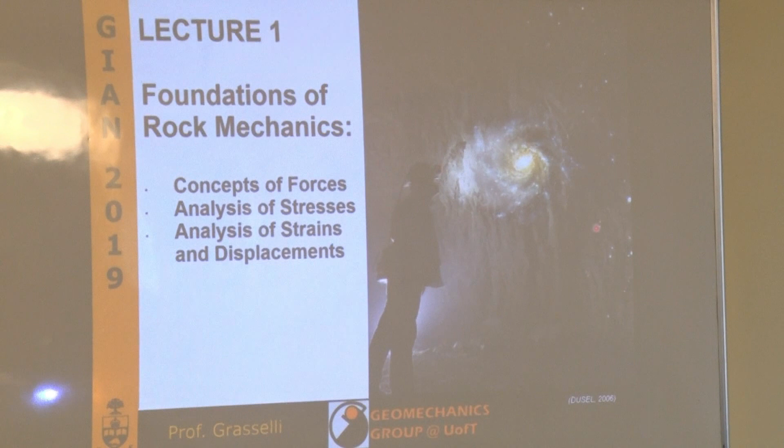And again, all what is there will be given to you - the equations and all the others will be available. So just a couple of things, just a definition. Let's remind what stress is and what strain is. Stress is basically a force that is applied over an area.

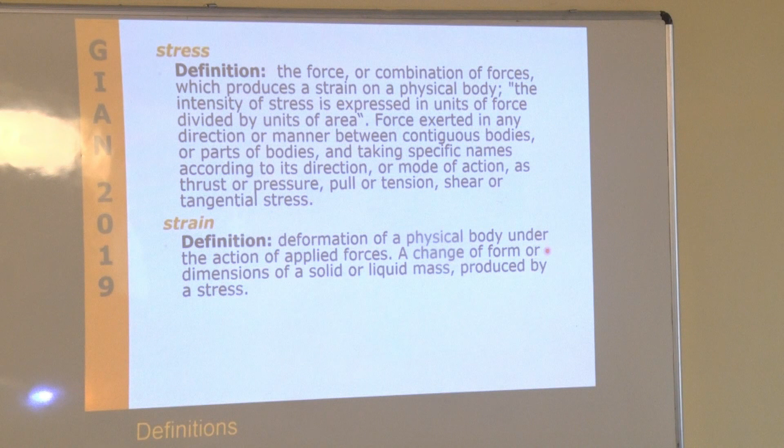And stresses can be compressive stress, can be tensile stresses, can be shear stresses. It depends really on how they are applied with respect to that particular plane where the force is going to be distributed.

The strain is really the result of the action of the forces in the body - so it's really the deformation. That means how shortened or what is the elongation of that body with respect to its initial dimension. That's pretty much what you need to remember.

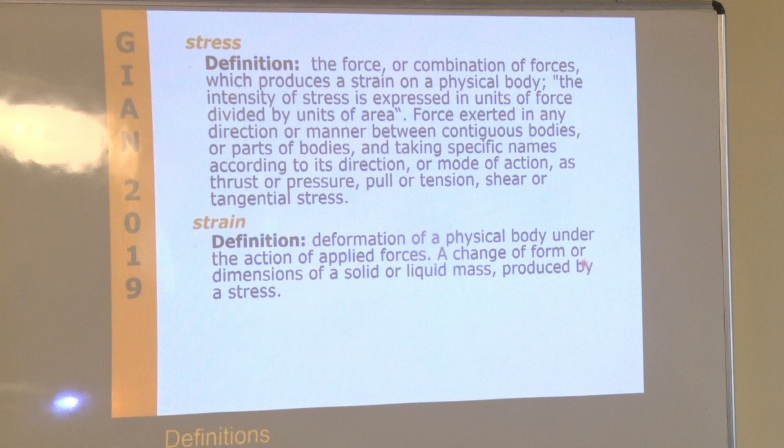So what we are looking at is, well, the force really is a vector. You can always resolve your vector, for example, into a normal and a tangential component with respect to a point, a plane. And the stress is really the distribution of that particular force with respect to an area - so it's really defined with respect to a plane. And that's really what we are going to use.

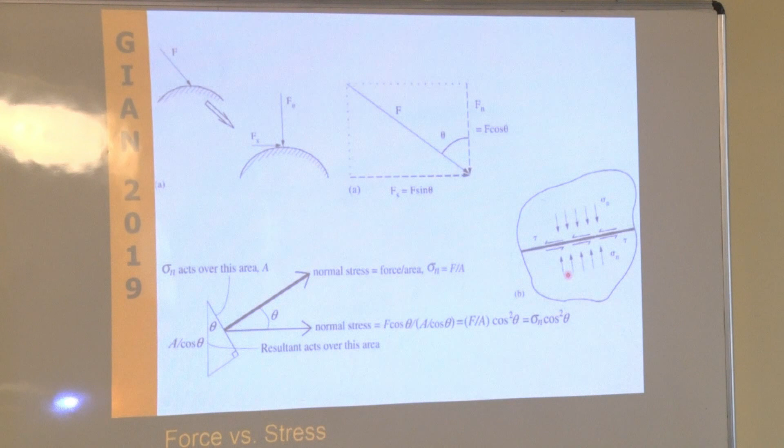The stress is, at the end, a property at a given point. And within a rock mass, what we are looking at and trying to always understand is what is the stress at one given location.

Because that stress will result in a displacement, a deformation, and that deformation is really what is going to cause potentially the failure of your rock. And that is really the challenge.

And what I really would like is there's math behind this, but math is a very nice tool, though it shouldn't be the goal of this course. It should be a tool to actually understand and resolve mathematically what is the condition of the rock.

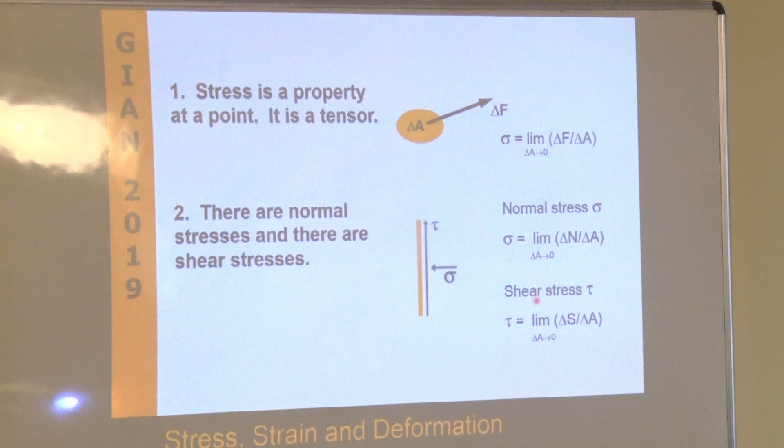So the thing we need to remember, which is very important, is that stresses with respect to a plane can be perpendicular, which is normal stress, or tangential to that plane, which are shear stresses. Those are the two things we really need to care about, because those are the stresses we need to resolve and understand to figure out if our rock is going to be stable or not. That's pretty much what we have.

So from a mathematical point of view, we can have our cubic element, and resolve stresses in the three axes: sigma x, y, and z. On each single facet of that cube, we can resolve, along two axes that we arbitrarily choose, what are the shear stresses along those facets. Mathematically, we can write them in matrix form.

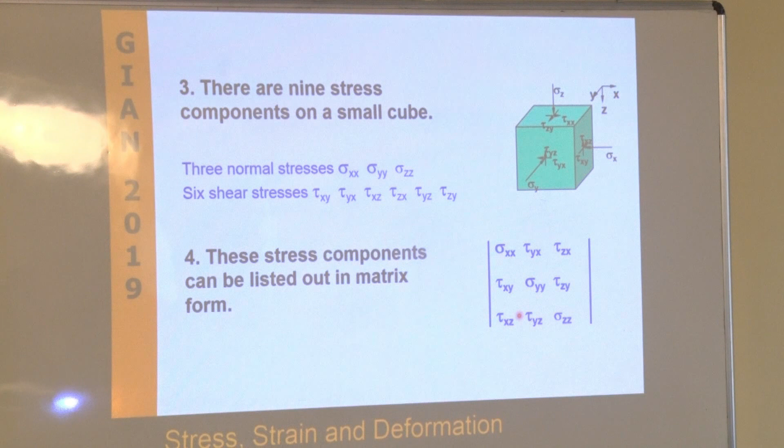Then, because of equilibrium, we can actually derive that matrix is symmetrical. So, for example, tau xy is equal to tau yx.

Okay, that's something that I'm sure you have already done, right? Yes. I'm not asking if you remember, I'm asking if you have done it. Yes. Okay, that's a very big difference.

I know that you have the notes, and if you need, you will go and try to find them, or maybe Google for the solutions. That's fine.

The other important thing is that we can always find the directions along which the shear stresses basically disappear and go to zero. So our matrix becomes diagonal mathematically. That's important because we can define our stress state with only three variables called principal stresses: sigma 1, sigma 2, and sigma 3, where 1 is the highest, 2 is the intermediate, and 3 is the lowest. Those are the three stresses we are always looking at.

But we need also to know how to go from one state, one orientation of our small cube where we have only sigma 1, sigma 2, sigma 3, to another one where we have also the shear components. Why do we need that? Any idea? Why do we need that?

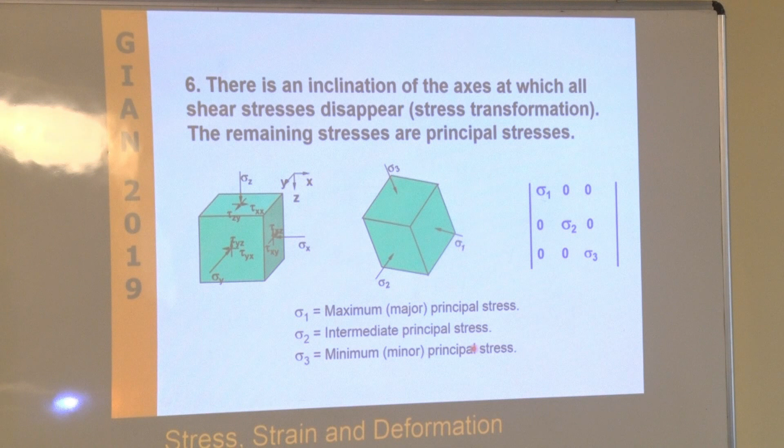Oh, by the way, I'm asking questions, and I was told that normally these types of classes you are extremely talkative. So just don't tell me that it's not correct.

Why do I care? Why do I care to know, to be able to go from one orientation to the other? What do I care? Okay, I will ask you later. You don't want to answer? Okay, you will get the question again.

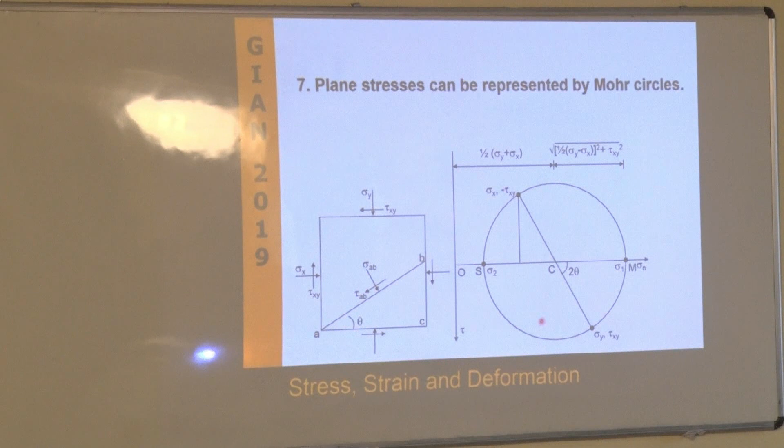So the other thing is, oh sure, that's the answer. So why? Because we can always resolve what is the normal and tangential force on any given plane, specifically on a plane where, for example, a fracture exists. So we know what is the shear force and the normal force on that particular plane.

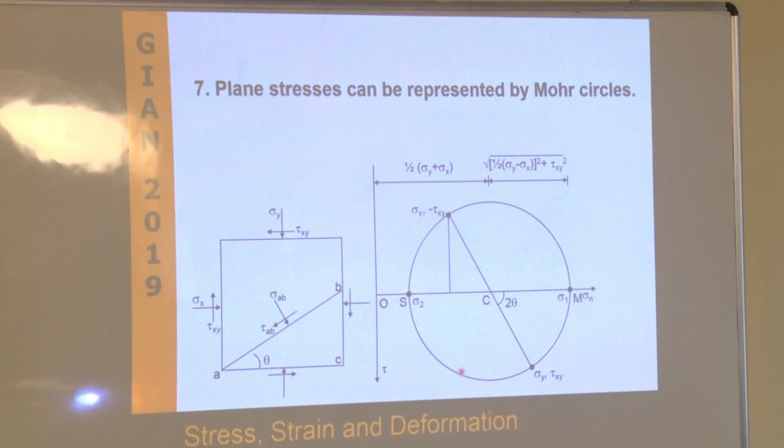And one very simple way to actually picture that in two dimensions is nothing else than using the Mohr's circle. And you will remember, it's good.

The other thing that is important is to realize that when we apply stress to any body, that body will react in some way and will start to deform. That means there will be a deformation that is related and associated to the stress that is applied, right?

So if the material is perfectly elastic, the ratio is so-called E, the Young's modulus. And that is what our books are saying. We can find the Young's modulus of rock, and we're happy because we can design anything with that. And I will see what is the flaw then.

But it's correct that normally when you have a linear relationship between the strain that you measure and the stress you apply, that is really the elastic behavior of the material, and that relationship can be described by this quantity E, which is nothing else than the slope of the plot between strain and stress applied, okay?

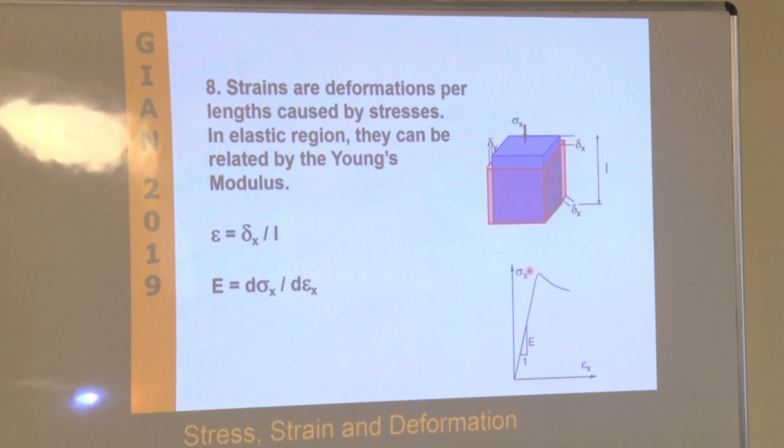The other thing we need to be aware of is that when I deform a material, say I apply my force along one single axis, what is happening is that yes, I make that object shorter. But at the same time, the material also deforms in the other two directions.

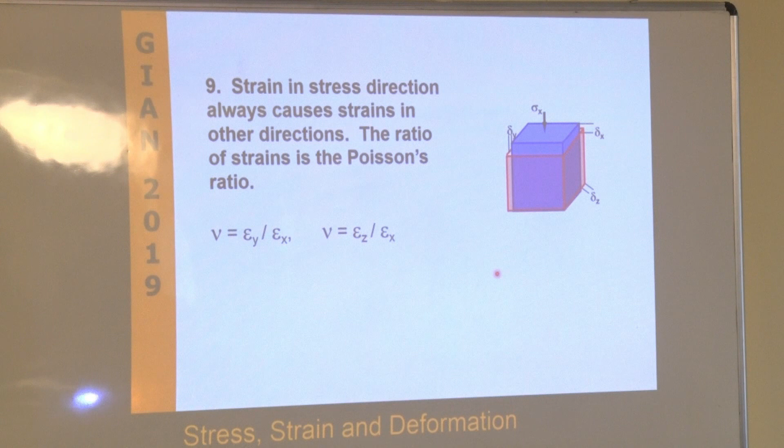So what we can define is another quantity called the Poisson ratio. That is the ratio between the lateral strain and the axial strain. If we have a cube, we can define two different lateral strains, one along Z and one along Y, so we have two Poisson ratios. If it is linear elastic, those two Poisson ratios will be exactly the same. Poisson ratio is a constant for a material when it is linear elastic.

The other thing we can do is put all that information together, so the strains and stresses can be related by quantities such as the Poisson ratio. Those relationships give us what is the constitutive law of the material, which tells us how the material deforms under a particular given stress. The matrix in the middle is made of those elastic constants, basically the Poisson ratio and the Young's modulus.

Now, I'll spoil immediately what I'm going to say: this is valid for linear elastic or elastic material. Is the rock elastic? That's the question. And the answer is no. That's the problem. It is elastic in a very specific range that personally we don't care about, because what we are looking at is always to avoid failure, but to get as close as possible to failure as we can. And when we get there, the material is not elastic anymore. That's a challenge we face, especially in mining.

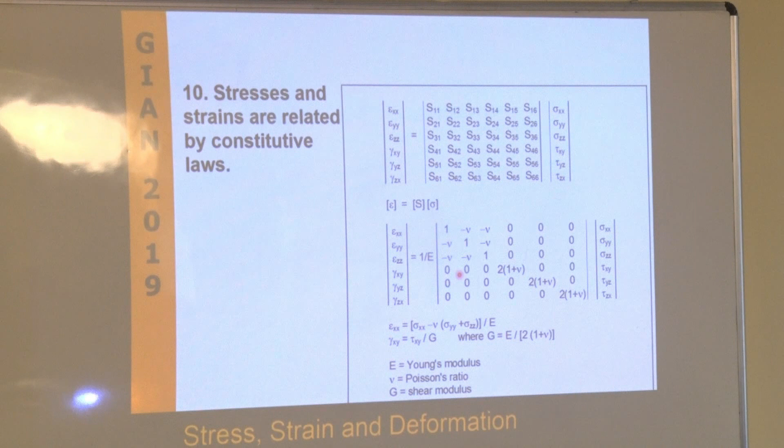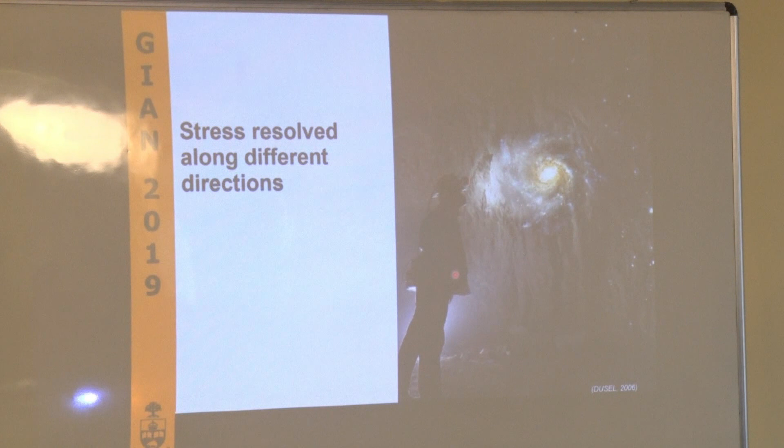Now, the thing we always need to be able to do is resolve the stress in any direction. Specifically, what we want is, given a particular stress state, we generally like to use the principal stresses where the shear disappears.

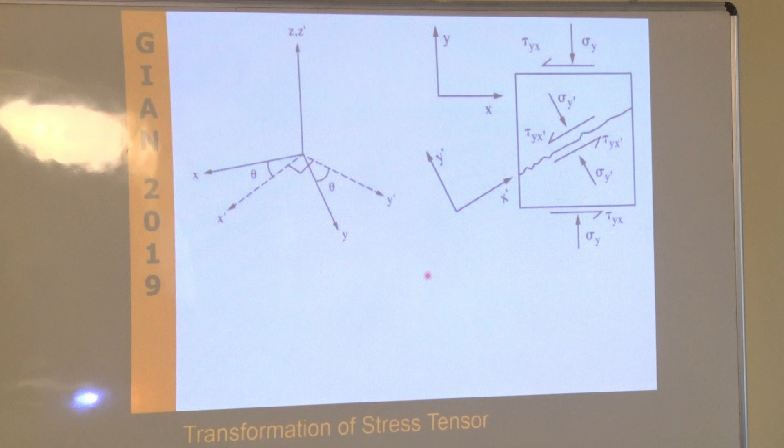But then we have fractures, features, geological contacts, or whatever, where we need to know what is the shear stress applied there, and also the normal stress, because the two will tell us if the particular stress condition and geometrical condition is going to be stable or not. That's really the challenge. So we need to be able to resolve what are the normal stresses and the shear stresses on one given plane, and that is where the math comes back.

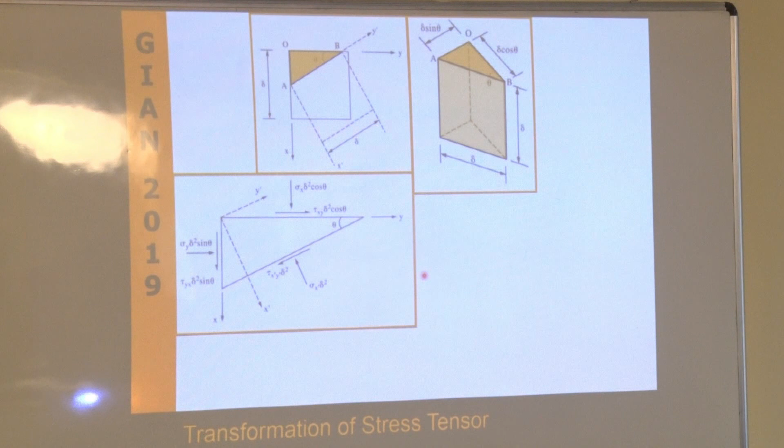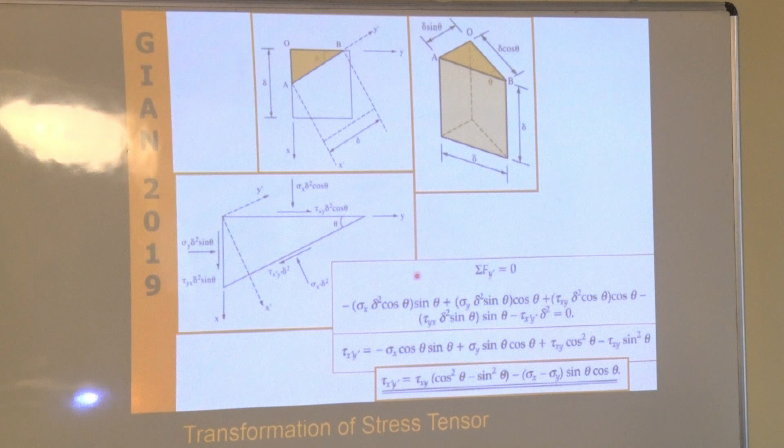So at the end, what you want is to transform your stress tensor and resolve what the condition of the stress is in that particular direction. You start using equations like this. You remember those, right? So my point is that yes, you have this math and you actually need to use it, because what we want is to be able to go from one condition to the other and back.

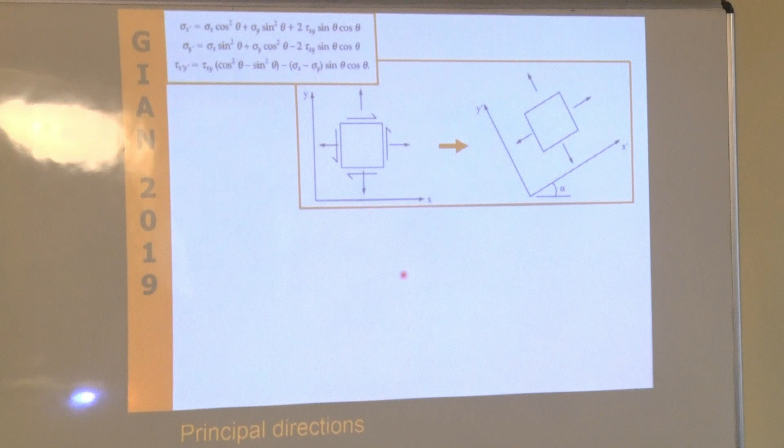If you do this calculation all the time, you will remember it by heart, and those equations will be your friend. The reality is that if you don't do this calculation all the time, you'll have a book and these notes, and you can just refer to them and use them.

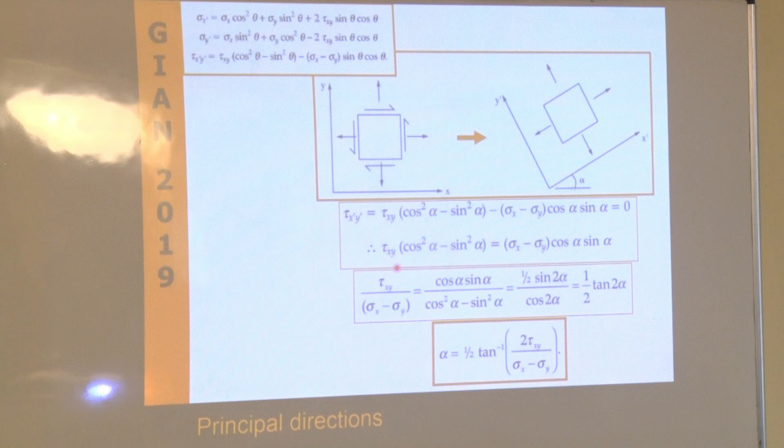And then what you can also do is calculate exactly the orientation, the angle with respect to which you need to orient, to turn your particular stresses. This is very important, because it tells you the orientation of the principal stresses, and those will tell you how the rock is going to behave. That condition is really what you need to understand—more than the math behind it, which I'm sure you can solve—I'd like you to understand where and how those stresses will be oriented, where the principal stresses act with respect to a particular condition.

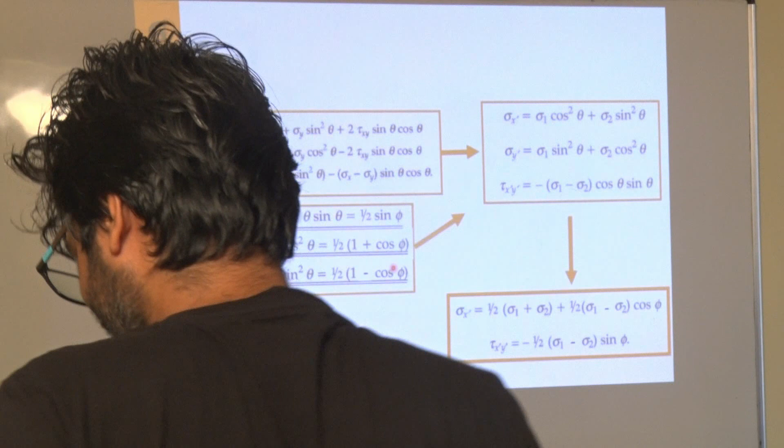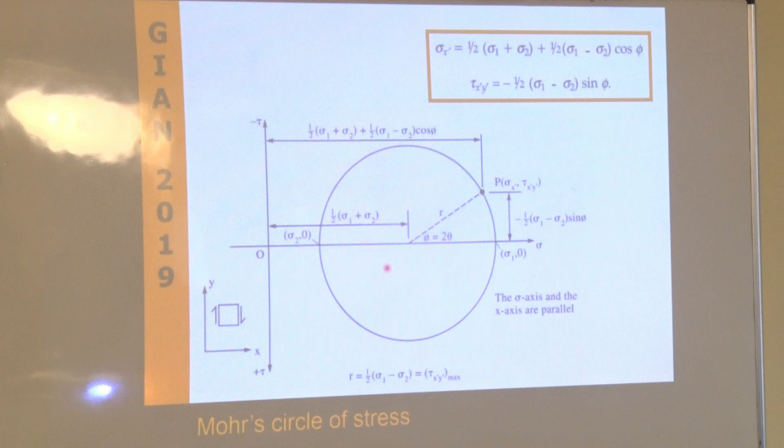A little bit more equations, a little bit more equations. I know, I'm skipping that because I'm not going through that math, which you can solve by yourself, either analytically or just using Mohr circles.

And this is really what we should start looking at. So we should start thinking about how the stresses are going to be distributed with respect to the rock, and start understanding how the rock will respond under those stresses. Okay?

So the exact value of the stress, yes, you can calculate. But as an engineer, especially in the mine or in the tunnel, a rock mechanics engineer, you need to be able to have a guess and understand how the rock might respond and what stresses you need to deal with, even before calculating. That comes from experience and from actually understanding the physics behind it.

And that is really, I think, what separates someone good at solving equations from a good engineer. You need to really understand how the rock will behave. Then you do the calculation just to verify and to get a number, a value, or a range of values. Because you have so many uncertainties in rocks that you cannot really have just one single value. You need a range. That range will help you actually engineer your problem and solve it.

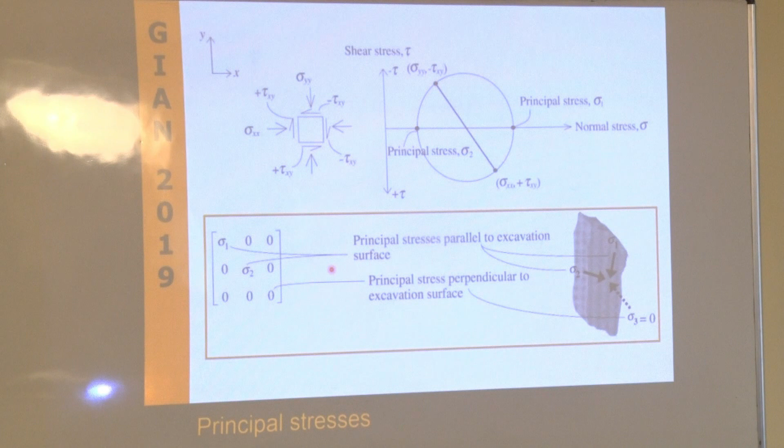What is sigma 1? Any idea? Come on, what does it mean? What are the principal stresses? Can you give me the orientation? At least the orientation, I don't care about the magnitude right now.

But you can tell me what are the relative magnitudes, and you should be able to give me the directions. What's vertical? I'm looking at the direction of sigma 1, sigma 2, and sigma 3. And actually, you can give me even the magnitude, at least of one of those. Speak loud, because I'm trying to speak loud, you need to speak loud. If I don't hear you, I cannot.

Weight of that beam. Weight of this beam. Okay, it's vertical. That is a weight. Okay, I'm asking for sigma 1, sigma 2, sigma 3. Becomes sigma 1. So what is the definition of sigma 1, sigma 2, sigma 3? Is the shear equal to 0, right?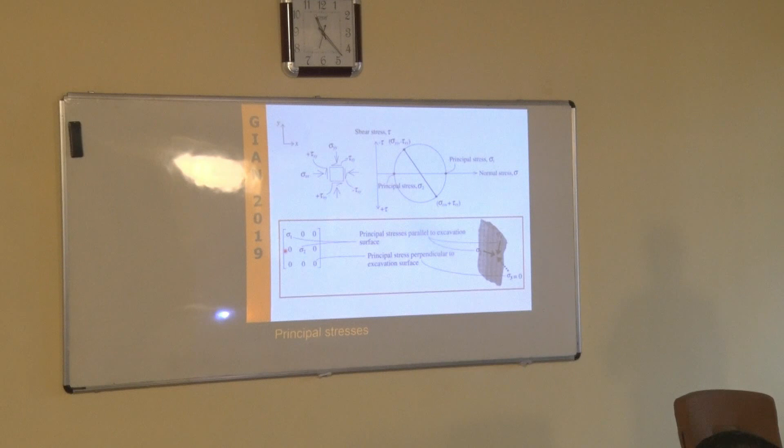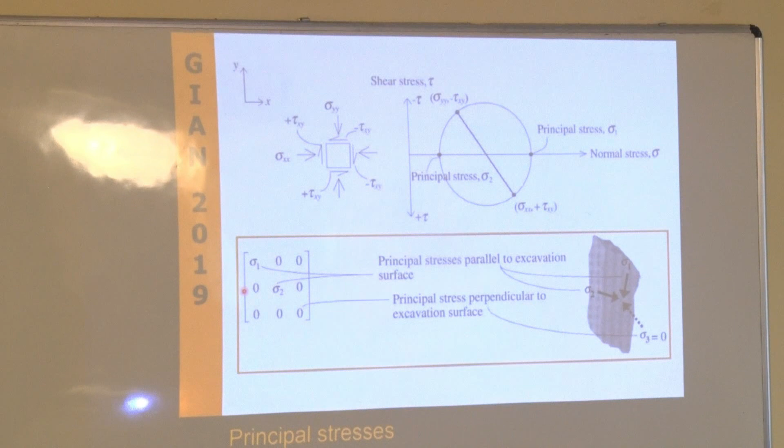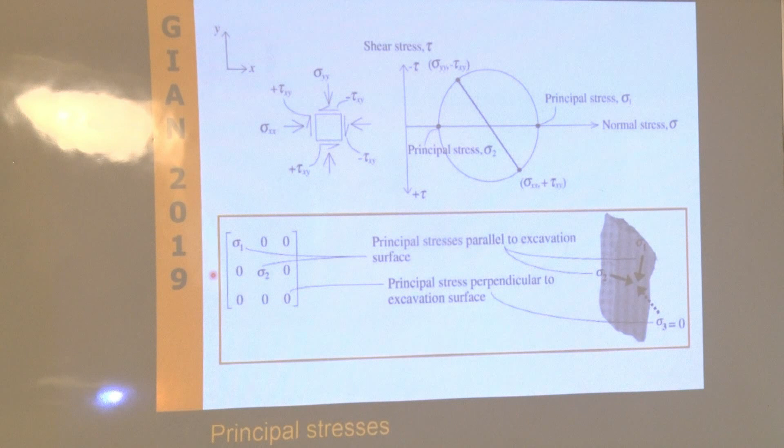So that is pretty much what you need to start thinking about: where the principal stresses are oriented with respect to your geometry, by simply looking at the definition, zero shear stress on that particular plane. When you start doing that, you bring a lot of common sense into the calculations, and you can actually connect the math behind it with reality. That's what you need to be able to do.

What does it mean? Let's go back to the fact that unfortunately our rocks are not nice material. A geological material has been created a very long time ago and went through a lot of stresses that have really broken that rock. It means that there are fractures, and a fracture is something that is pretty much open. You can think about it as a free surface.

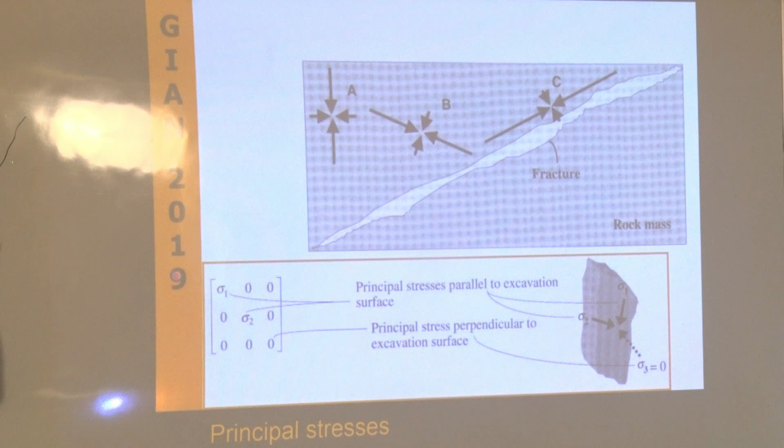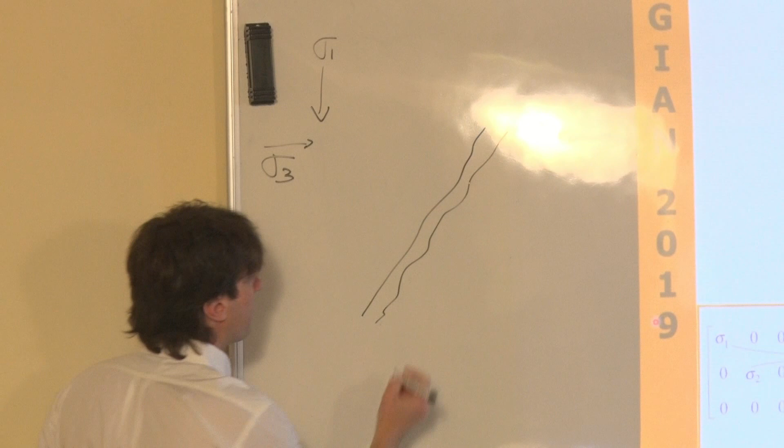So when you have a fracture that is open, what can you tell me about the stress acting on that surface? If it is fully open, then it's detached, so how are the principal stresses oriented? There is an air gap there. What are the stresses acting at that point? It's not touching. Sigma 1? Yes. How much is sigma 3? It would be 0.

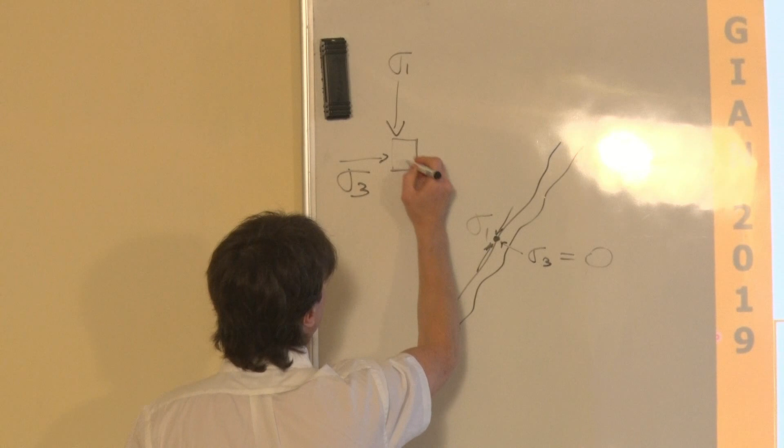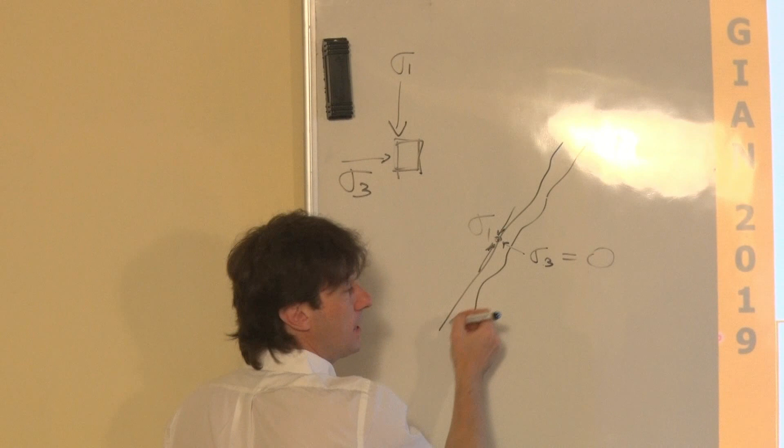So if sigma 3 is zero, I know that my sigma 1 is always perpendicular to sigma 3. So sigma 1 would be perpendicular, or parallel to that particular fracture. So what does it mean? That I have my cube, or my in-situ stress, with sigma 1 vertical and sigma 3 horizontal. Here sigma 3 disappears, and sigma 1 becomes oriented with respect to the direction of the fracture.

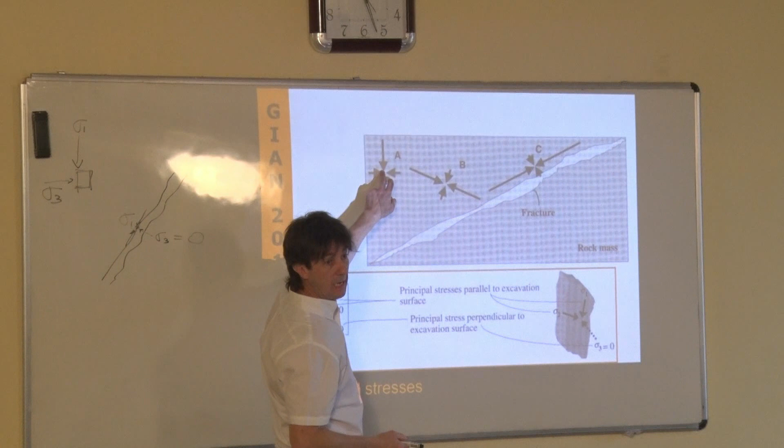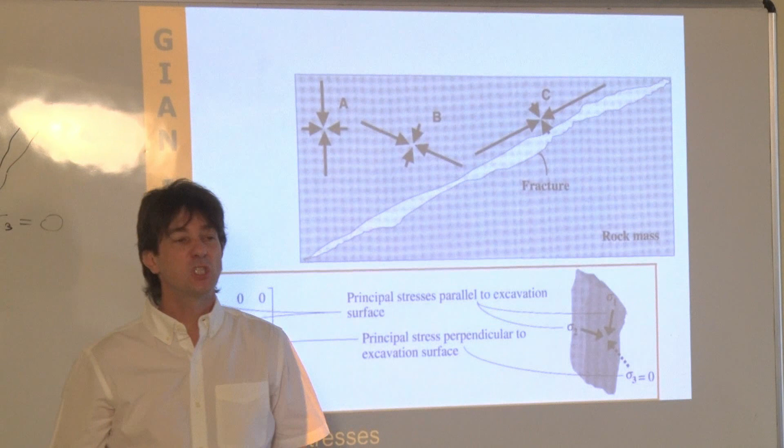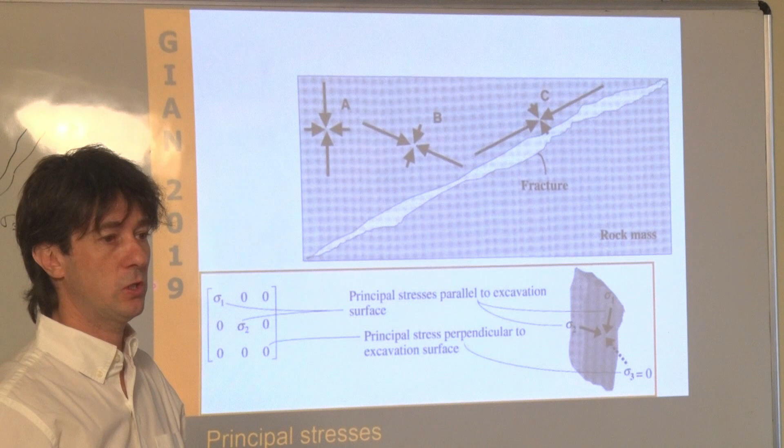So what it means is that you have a stress state at point A, far away, your far field stress. The closer you get to the fracture, that stress is disturbed. It means it's bothered by that fracture, and my principal stress will start rotating, up to basically becoming sigma 1 parallel to the fracture at the surface of the fracture. Do you understand that? You don't understand.

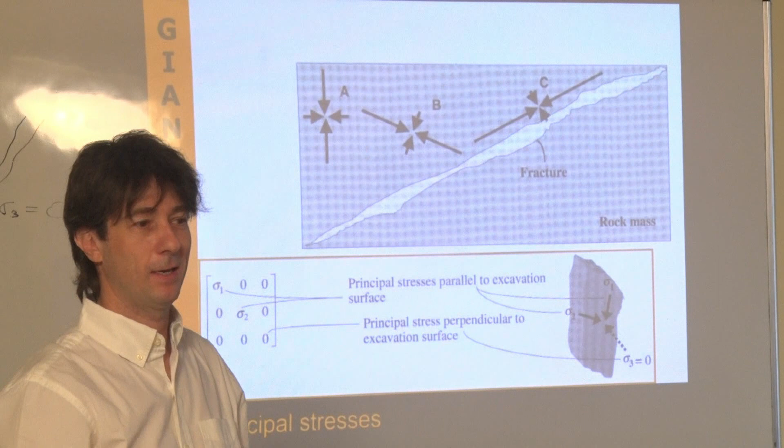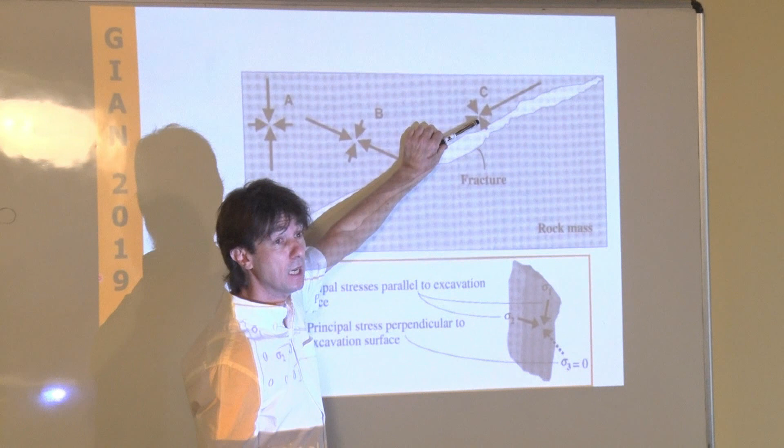What do you understand? What don't you understand? Why? So what you have is that your stresses, which are applied to your rock mass far away, feel the presence of your fracture. And that presence of the fracture, because it is open, means that at the surface of that fracture I will have a zero sigma. So the only stress that the rock at the surface will feel is really parallel to your fracture.

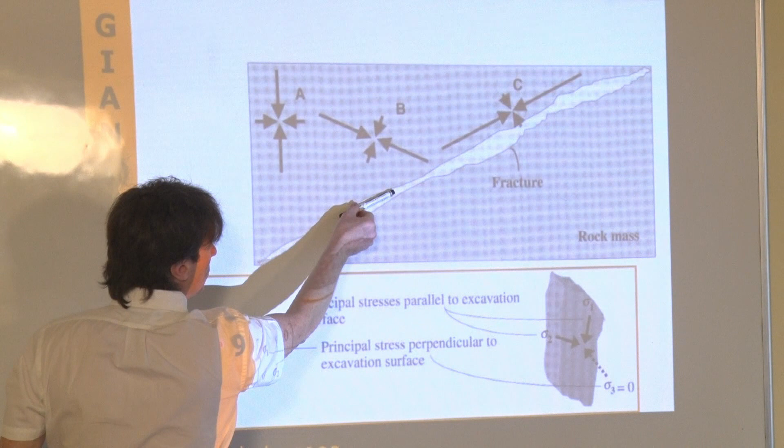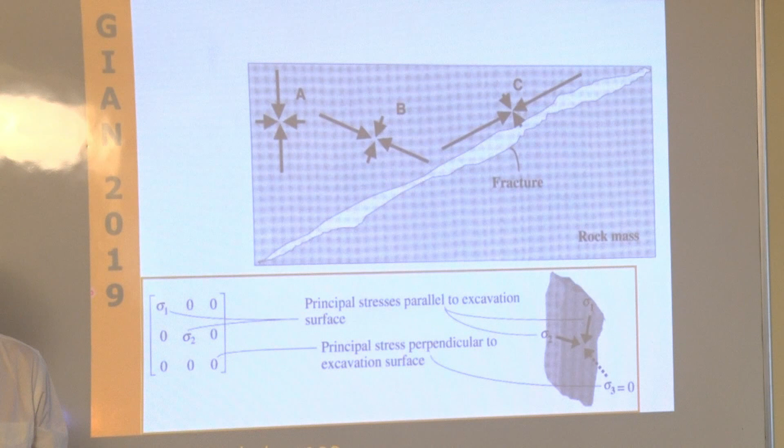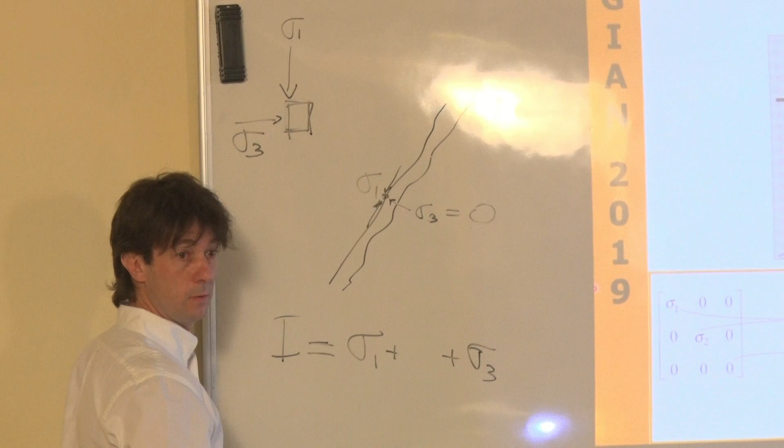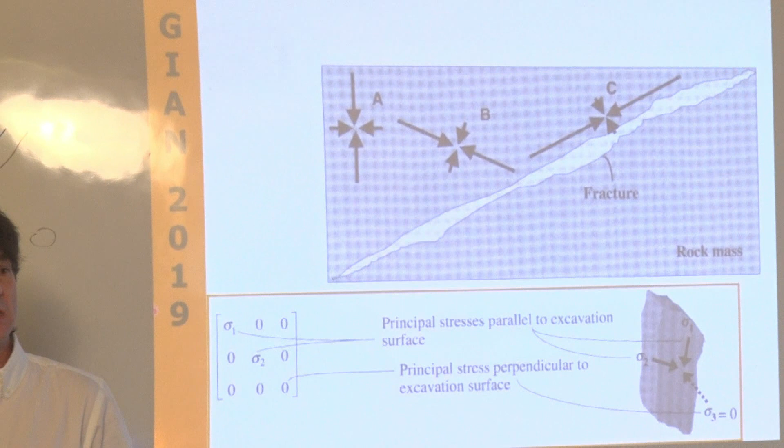But here it was oriented that way, there it would be oriented this way. This means that your stress goes from, let's say, sigma 1 vertical to sigma 1 parallel to the fracture, and it will start rotating up to that point. Plus, the magnitude is going to change, because you need to remember that the first invariant of stress says that sigma 1 plus sigma 2 plus sigma 3 is a constant. In this case, disregarding sigma 2, sigma 1 plus sigma 3 must be constant. That means that from a state of stress at A, at C you will experience basically a zero sigma 3, so sigma 1 becomes much higher.

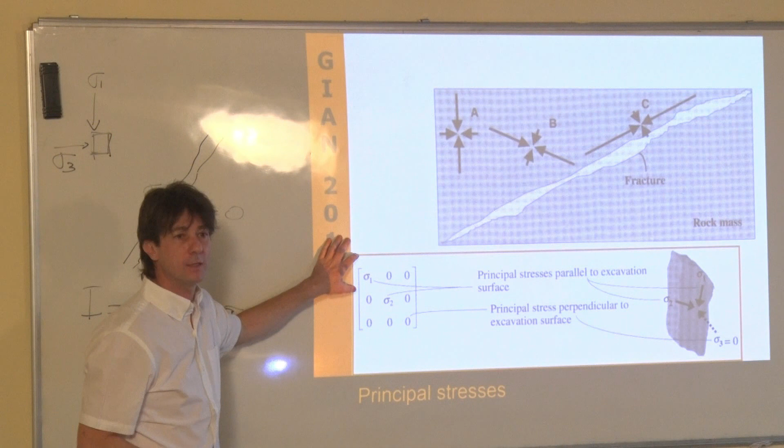What does it mean? It means that the rock will be subjected to a much higher stress, getting closer and closer to the point where the rock can fail. Is it okay? Sometimes when you don't understand and you do that, to me it means yes, this is yes, this is no, so I'm getting a little confused. But that's the point, and that leads to another point.

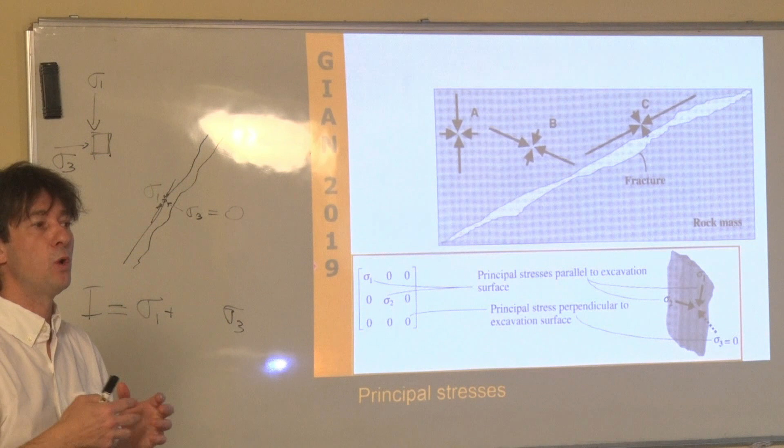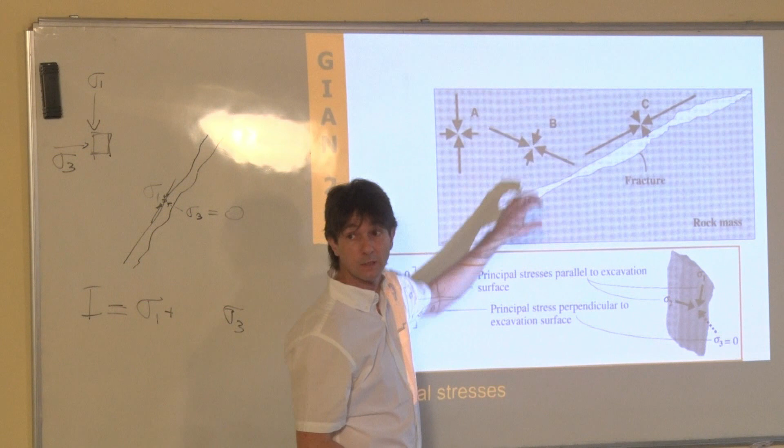The fact is that if you're creating an opening in the rock, could be a fracture, could be an excavation, could be whatever empty space, that empty space will perturb your stress. It means your stress will change locally, the direction of your principal stresses will change, and the magnitude of the stresses will change. So is it necessary that the principal stress will be parallel to that fracture? The maximum principal stress will be parallel to a free surface. If the fracture is a free surface, yes, it will be parallel, if the fracture is fully open. If it is not fully open, things become a little bit more complicated.

Are you okay so far? Confused? No? That's good, you're not. I'm doing a good job, or you came already prepared.

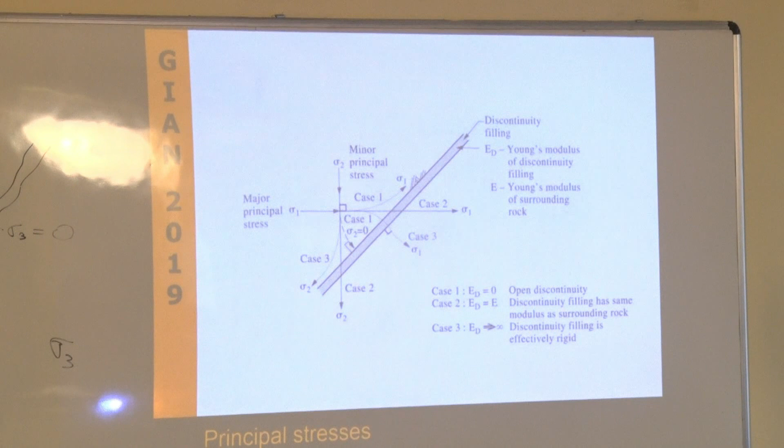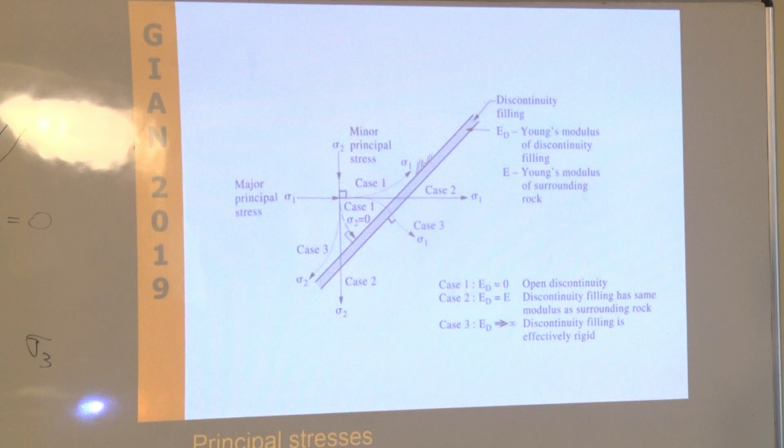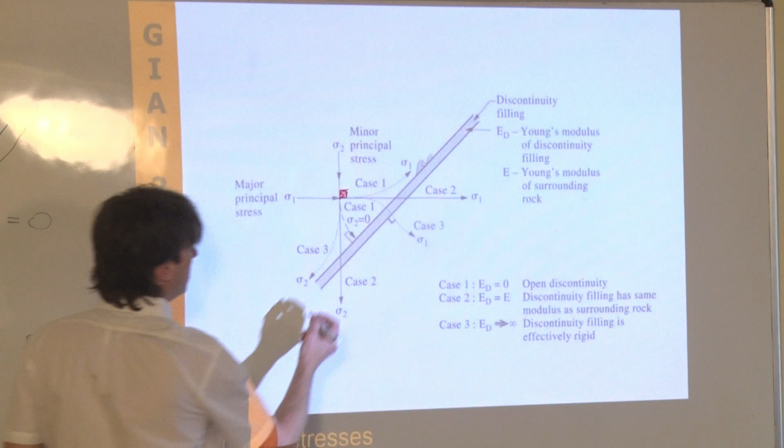So the first case is an open discontinuity, exactly what we saw before. We have our stress cube oriented with sigma 2 and sigma 1. Sigma 1 is horizontal, sigma 2 is vertical. And I have this fracture, this discontinuity, it's open.

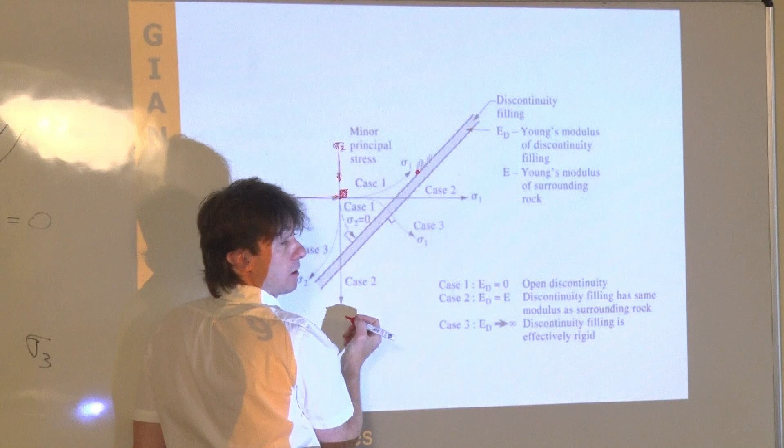So case 1 means that at this particular point, my sigma 3 is 0, and my sigma 1 will be oriented parallel to the open surface. Same concept as the pillar, okay? It means that your sigma 1 will rotate in this way. Do you follow that?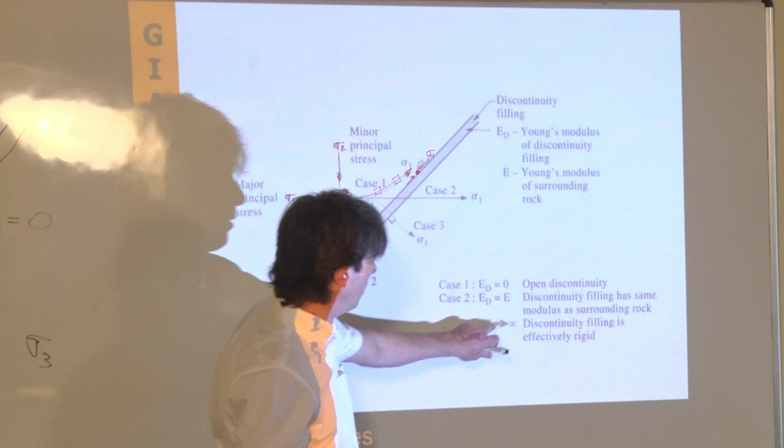That's the easy one. Now let's say the discontinuity is filled with the same material as the rock. What does that mean? The discontinuity pretty much does not exist. So in that case, my stress block will never change. There's nothing that will perturb that.

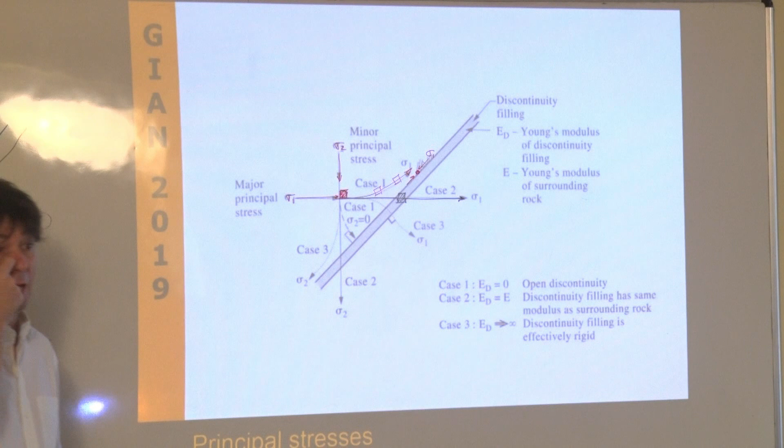There's another case where we might have an infilling, so my fracture is filled by a much stiffer material. Let's go back—is air stiffer or softer than rock? Softer, right? So in case 1, the Young's modulus of the infilling air is much smaller than the rock.

So in that case, sigma 1 will orient parallel to that discontinuity. If the infilling is the same as the rock, it doesn't matter, nothing happens—the stress stays oriented as in an intact material.

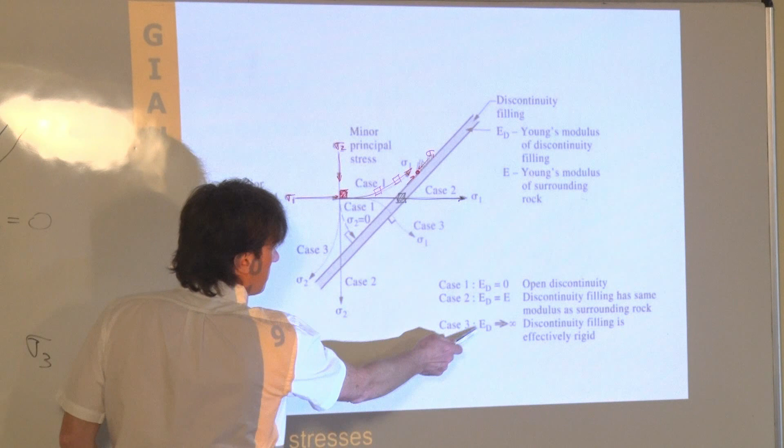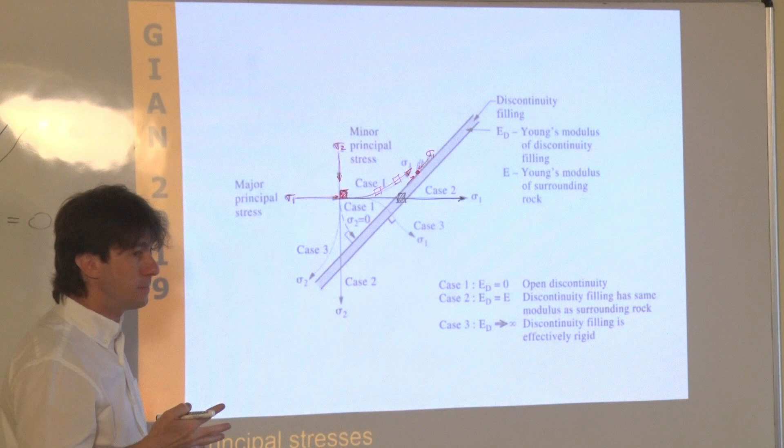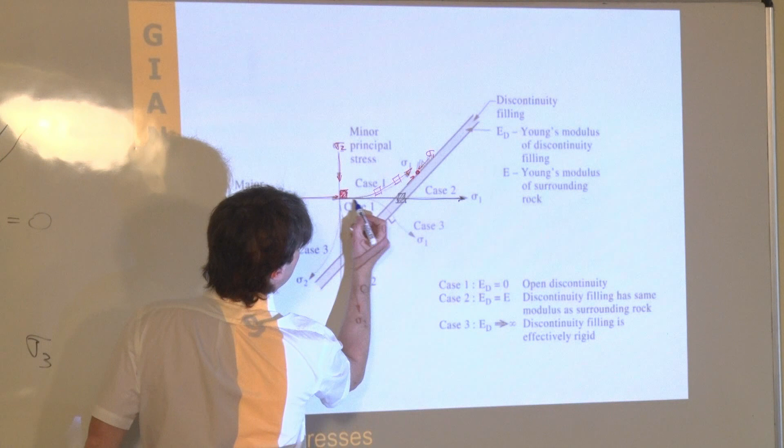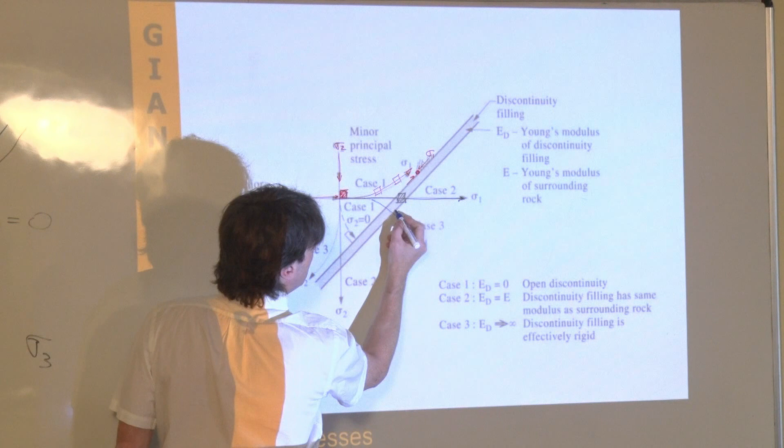If you have a much stronger, much stiffer material, what happens is that your stress will start to orient exactly the opposite. It means your sigma 1 will not be parallel anymore to the discontinuity, but will be perpendicular to that particular feature.

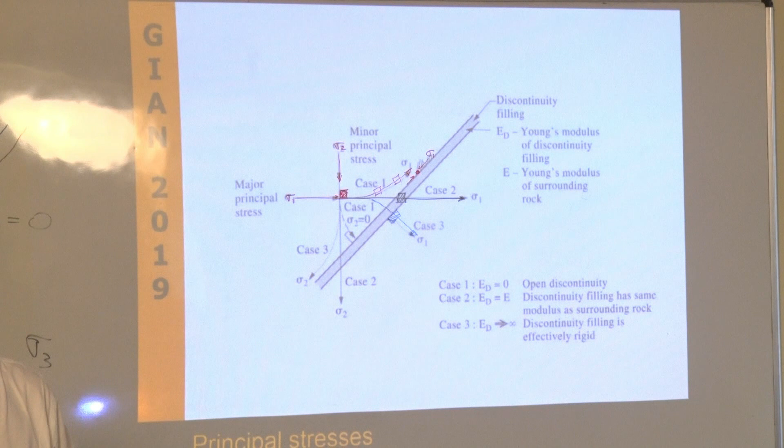So depending on whether there is a contrast in stiffness in your rock, that contrast will perturb the orientation of your stress state. Your stress will feel the stiffness of the material, and will be rotated. That's what you need to understand when dealing with a rock mass that is not homogeneous but heterogeneous—the stiffness of that material will differ from location to location.

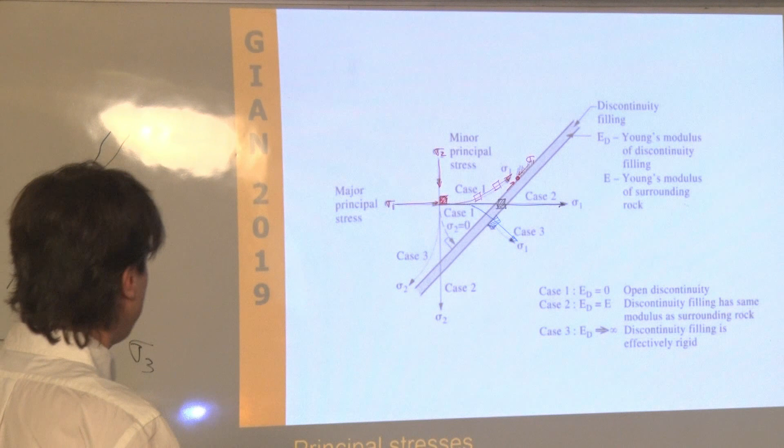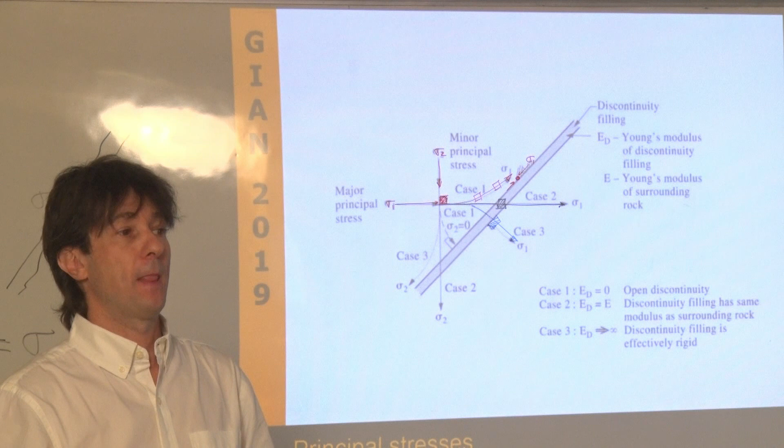This is very important in mining, because when we have intrusions like dikes, those dikes will highly influence the stress, completely changing the stress state with respect to that geological feature, and will create problems in the sense of highly concentrated potential stresses.

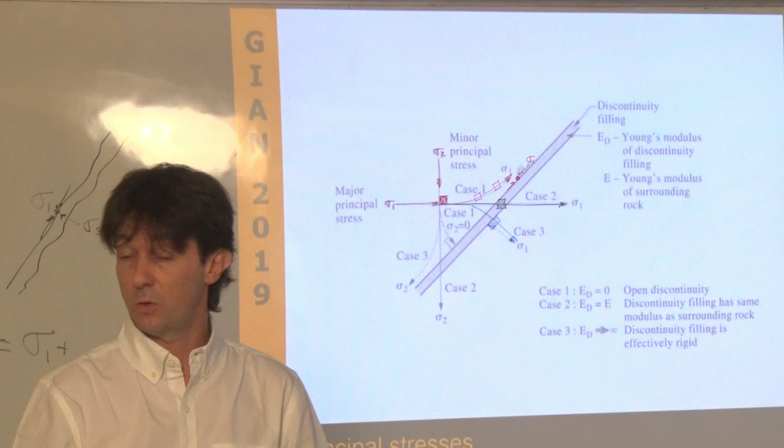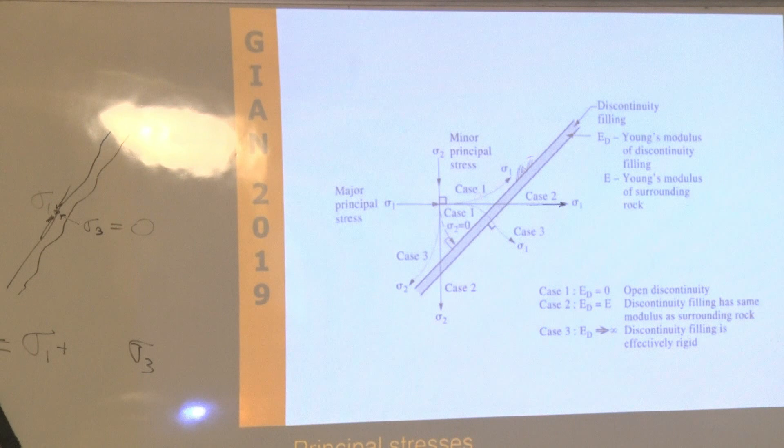Oh, I have an hour left. Do you have questions?

What I really would like is to bring a little bit of common sense into the math that is behind a stress state. That's pretty much what you should be able to do. Calculation, I trust you can do that—there's a lot of numerical tools you can use. But understanding how to interpret those tools and whether the results make sense, not just green and red colors, that's important.

That's really the value you, as engineers, will bring through modeling. It's not just a nice red and blue plot, or whatever color scale you use, but the interpretation—translating those to real cases, and especially being able to understand if those plots make sense or not. That's the added value and the reason why you'll be sought out by whoever commissions that particular study.

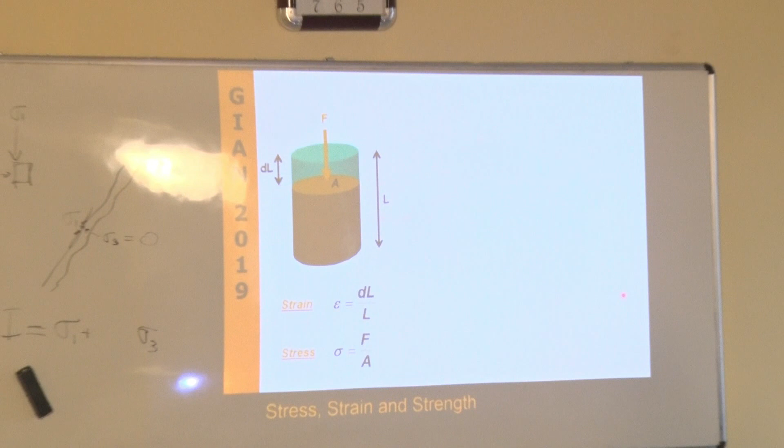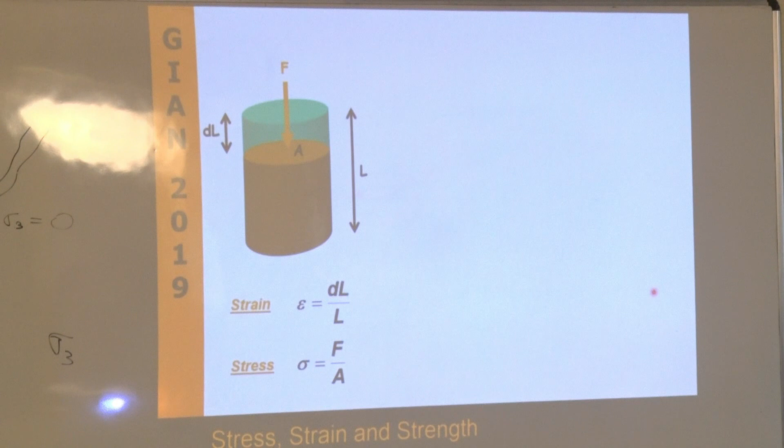Now, that's really the basics. Let's see a little bit more about load and failures. So what we said is that we have a force applied to a block of rock. That force is distributed across some plane, a surface, and you have a stress defined as the force divided by the area. You create a displacement, then a deformation.